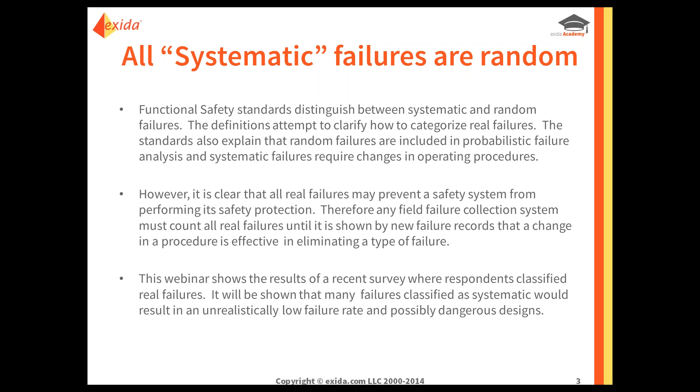We're going to also look at some real-world examples and talk about if it is a random failure or a systematic failure, and we're going to go through examples and actually do a couple of polls to see what your answers are and compare them to a survey that we sent out to see what other people's answers were. And we'll go through each question and pull it apart, why it would be considered random or systematic.

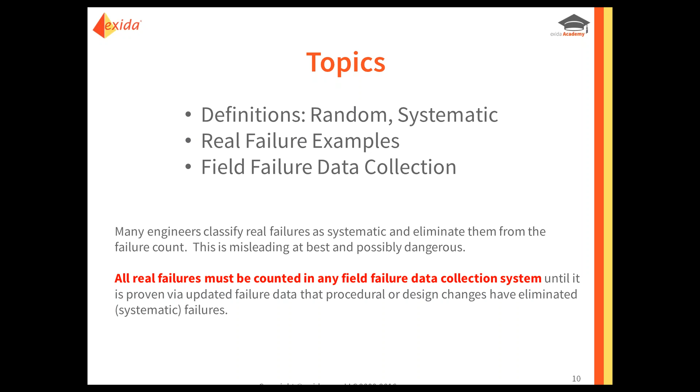This all comes to play where we take a look at end users' field failure data studies. And these data studies are an absolute rich opportunity to obtain site-specific failure rates and failure mode information about a specific product in a specific application.

But there are some problems when companies compare their end-user field failure data studies to each other's. First of all, a number of companies have either insufficient information on their field failure reports, or they have different data collection analysis methods, and they have different definitions of what is a failure. Some companies would take the exact same failure in the exact same application, and one company would say it's random and one company would say it's systematic.

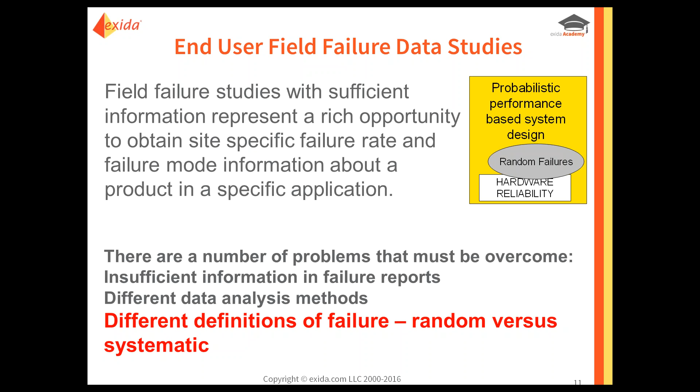And because of those, the end user field failure data studies are getting a little bit of a bad rap. But that's not what we want to portray. We want to show that there could be very valuable information in these data studies. However, you need to know all of the things to look for when you incur one.

So the first thing to understanding random versus systematic failures is looking at the actual definitions from IEC 61508. And both of these definitions were pulled from the latest IEC 61508 standard, which was updated in 2010. They define a random hardware failure as a failure occurring at a random time which results from one or more of possible degradation mechanisms in hardware. Okay, well, that doesn't really tell you very much. So we can understand why random failures are a little confusing.

When you look at the definition for a systematic failure, it does tell you a little bit more information. A systematic failure is a failure related in a deterministic way to a certain cause, which can only be eliminated by a modification of the design, or of the manufacturing process, or the operational procedures, or some kind of documentation, or other relevant factors. So it's a lot easier to understand what a systematic failure is from this definition than the random failure, but it's still not cut and dry.

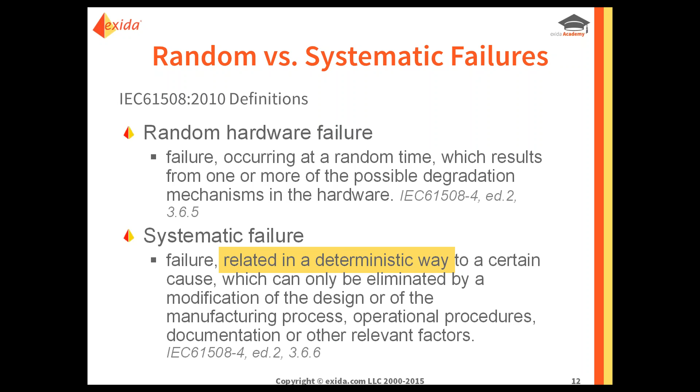So the new edition of IEC 61511 has just been updated in 2016, and they improved the definition of a systematic failure. And it now reads, a systematic failure is a failure related to a pre-existing fault which consistently occurs under a particular condition and which can only be eliminated by removing the fault by a modification of the design, of the manufacturing process, of the operating procedures, the documentation, or other relevant factors.

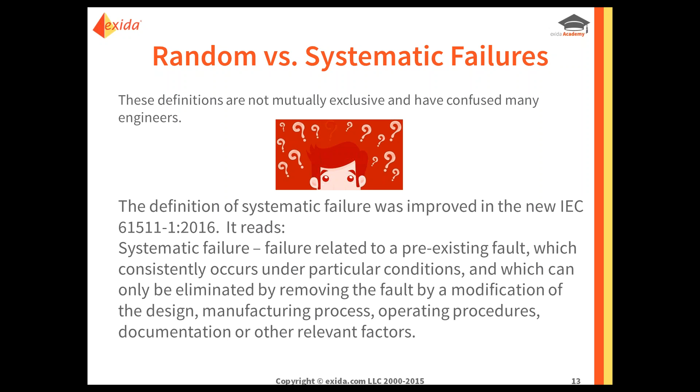So you still have to change something in documents or procedures in the systematic definition. But the beginning of the definition in the 61511 explains what they mean a little bit more for a systematic failure. In doing so, the focus on the systematic definition should be made resulting in a safe, practical interpretation. So looking at the 61511 definition, besides changing the process or the documents or the design, what really stands out now is that there's a pre-existing fault which occurs in random conditions. So we're going to take a closer look at what that actually means.

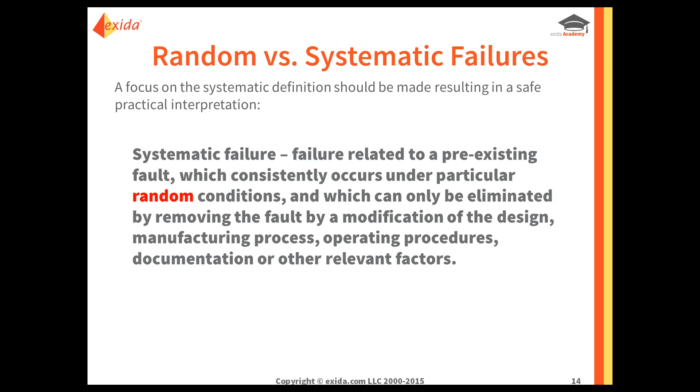So a systematic failure will cause an increase in the probability of failure on demand, just like any random failure, as particular conditions can be modeled in the same way. Thus, it is essential that all failures be included in a failure rate analysis. And we will understand what all of that means later on.

But for now, remember that systematic failures will continue to occur until they are effectively addressed by design changes, by process improvements, by better training or better documentation, better reviewing, better testing. With systematic failures, there has to be something that is improved upon. And until that improvement is taken into consideration and you retest or you redo the documentation, making sure that this problem isn't going to pop up again, it needs to be counted in failure rates because it will keep happening until it is properly addressed.

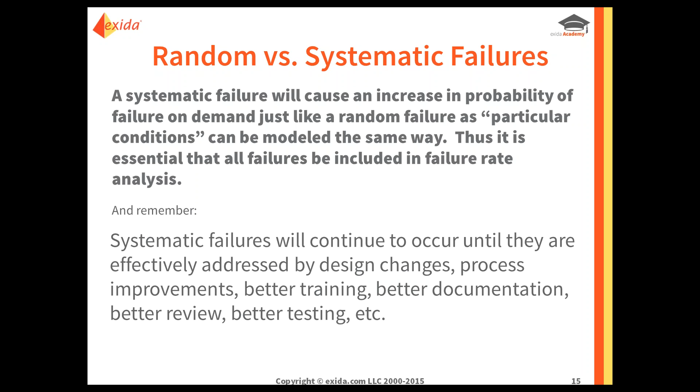So some tend to classify many real-life failures as systematic. And in doing so, they end up with very low and unrealistic random failure numbers. And we think that that has a lot to do with the blurred line of what is random and what is systematic. And it's simply not defined well.

It should always be the objective of any failure data collection program to collect all of the information on all of the failures and count all realistic failure rates as random until it is absolutely proven that systematic changes have eliminated any future failures of a given type.

So until you know that your changes affect that systematic failure in a positive way, you need to count that systematic failure as random. And then once you've changed the documentation or the design, you've changed the material that wasn't quite working out, you've had multiple batches go through, you made sure that it's not going to have the same issue, then count it as a systematic failure.

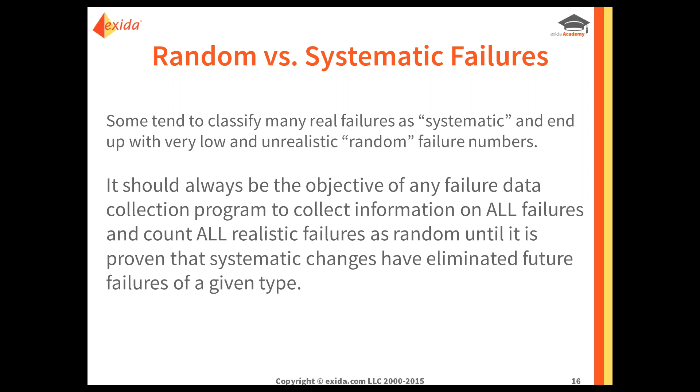So I learn best from looking at real-life examples. And I thought we could do that today to really make this all sink in. I'm going to first read a scenario and ask you, is it random or systematic? In doing so, I will open up a poll and ask you to answer. And I can't see who voted for what. I can't look that up. It doesn't really matter to me.

But we sent out 15 questions to a mailing list, and we chose 3 of the 15 to show you today. We sent out the survey, and we had a bunch of answers come in. And I'm going to compare our answers to the survey that we did and see how real-life examples could possibly be problematic. Or you can see how many companies in different locations have different definitions of what is random or what is systematic.

So for the first example, we're going to look at a flood alarm system that failed to annunciate high water levels in an industrial process such that an orderly shutdown could not occur and electrical power was not disconnected. This resulted in significant equipment damage beyond the normal cleanup cost.

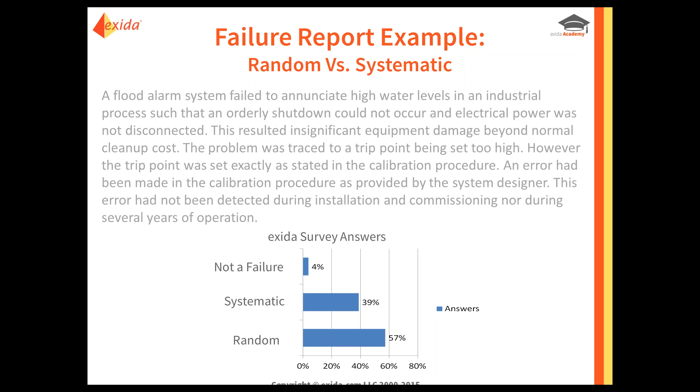So our webinar had a more clear direction that people wanted to head, but as you can see from the survey answers, it's not necessarily black or white. This is not a cut and dry definition or even example. And these are real world examples that we're looking at, so we can understand how it could be quite confusing. So let's break apart the question and see what you should concentrate on and what you should look at here.

So the main problem was that the trip point was set too high. So the first question you should ask yourself: would this failure still have occurred if procedures were corrected? Probably not. No, the failure was simply caused by the incorrect information stated in the document. Okay, so if this failure was classified as systematic and not included in a failure count, would that count be dangerously optimistic?

No, I don't think so. The calculated dangerous failure rate would be considered fine if the problem has been corrected. So if the problem has not been corrected yet, we would consider this a random failure.

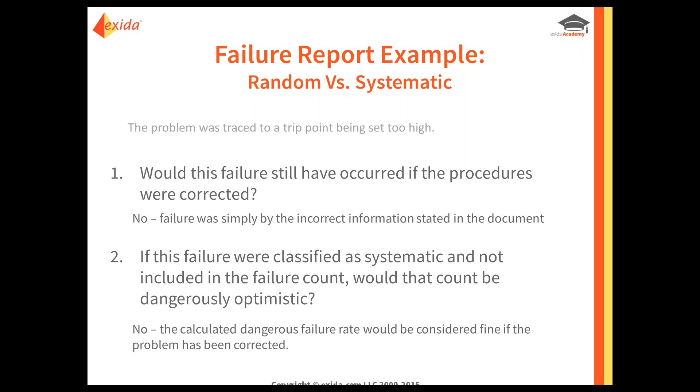But if the document has been changed, if there has been some time that passed and people have been setting that trip point to the corrected procedure, then that error would no longer happen. So if all of that has been taken care of and you have proof that this was just because of the procedures, it is taken care of, will not happen again, then it is a systematic error. And you can count it as such. You do not need to count it in your failure rates.

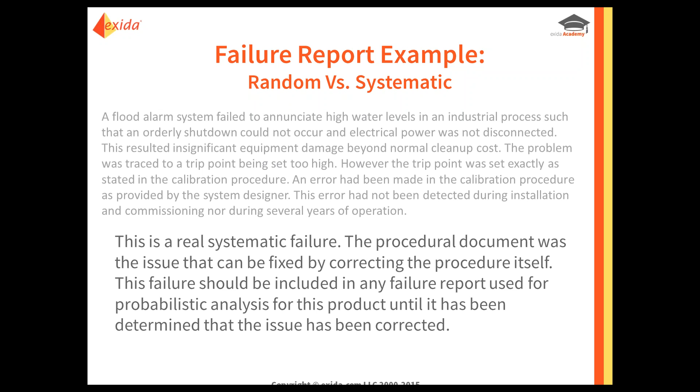So the procedural document was the issue that can be fixed by correcting the procedure itself. This failure should be included in any failure report used for probabilistic analysis for this product until it has been determined that the issue has been corrected. Okay, so now let's take a look at some harder questions.

Next, we're going to look at a failure that occurred when a de-energized to trip remote actuated valve closed and shut down the process during normal operation. The failure was traced to a PLC logic solver rated to 50 degrees C, where an output module failed de-energized. A component in the output module, a transistor, had failed such that it could no longer conduct current.

The ambient temperature was hot. It was 55 degrees C. They did an X-ray of the transistor to see what happened, and it showed a burned out bond wire, likely due to an electrical overstress. So I'm going to open up the polls again. So do you consider this failure random or systematic?

Now if you go ahead and vote again, if this was random or systematic. Once again, I cannot see who voted what, so it doesn't matter if you're right or wrong. This is just for education. Okay, we have a good portion of the votes in. Great.

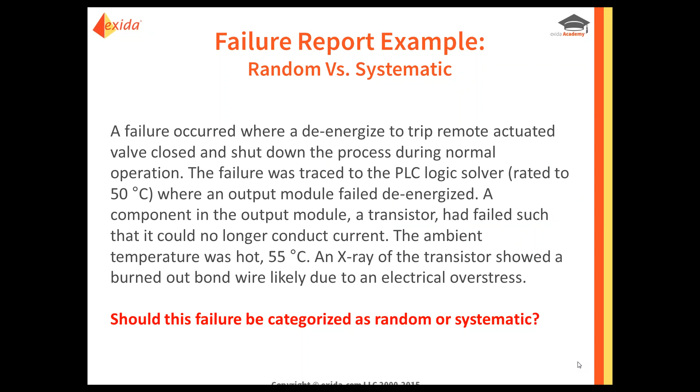So I'm going to share with you what our webinar saw it as. And as you can see, 43% of the people in the webinar said this was a random failure, and 57% said systematic. So we're pretty evenly split. It's not something that you can say, oh, it's definitely random, or oh, it's definitely systematic.

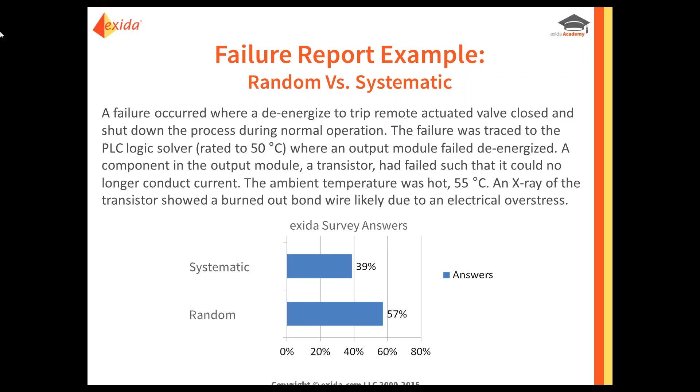So we'll take a look at what our survey said. And our survey was kind of flip-flop. It said 39% of people that took our survey thought it was systematic, where 57% said it was random. So once again, you can't really say there was a clear direction either way. So let's break apart this question.

So the X-ray of the transistor showed a burned out bond wire, likely due to an electrical overstress. So the first thing that we want you to ask: would this failure still have occurred if the temperature had been 45 degrees instead of 55? Actually, it probably would have, because the failure was caused by an electrical overstress.

So if this failure was classified as systematic and not included in the failure count, would the count be dangerously optimistic? Probably. The calculated dangerous failure rate would be too low. This would need to be a random failure and counted in their failure rate.

And the explanation is this is a real random failure. Although some argue that it should be classified as a systematic failure because the actual temperature was greater than the specification, that factor did not cause the failure. This failure should clearly be included in any failure rate used for probabilistic analysis for this product. So we don't care if you call it random failure or systematic failure. The main bottom line is that it needs to be included in the product failure rate.

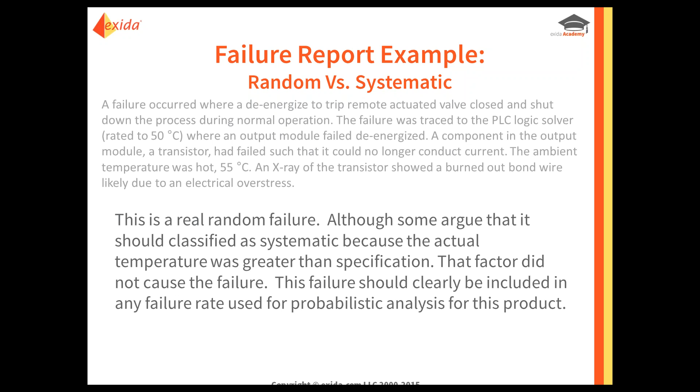So for the last question we have, a maintenance technician routinely checks and adjusts the trip point on a motor shutdown relay. The procedures for checking and adjusting the relay were all correct. All personnel were well trained in the procedure, and the failure occurred when a mistake was made with the adjustment. The trip point was set too high and the motor was not shut down to maintain safety. So once again, I'm going to open the poll: would you consider this a random or a systematic error?

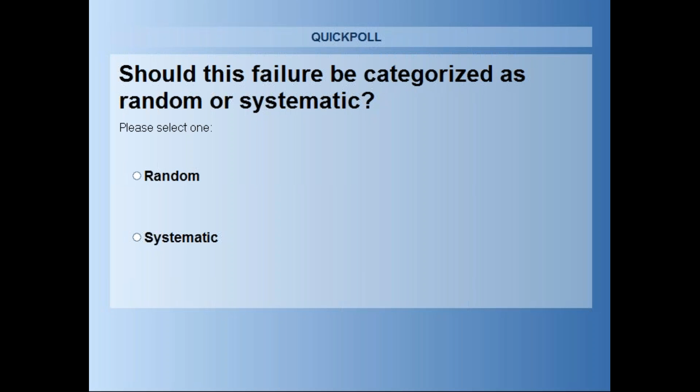Okay, the votes are coming in. Okay, we have a good portion of them in. Let's close it, and I will show you. There we go. As you can see, 42% of our webinar users think that this should be a random failure, while 58% said this should be a systematic failure.

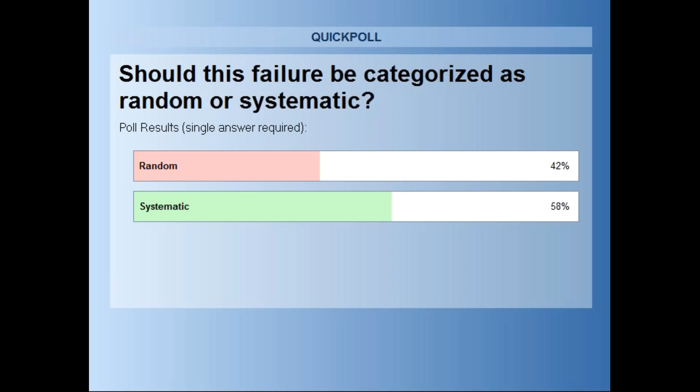So now let's compare that to our survey. And we were very, very close to our survey results, where 57% instead of 58% said systematic and 43 instead of 42 said random.

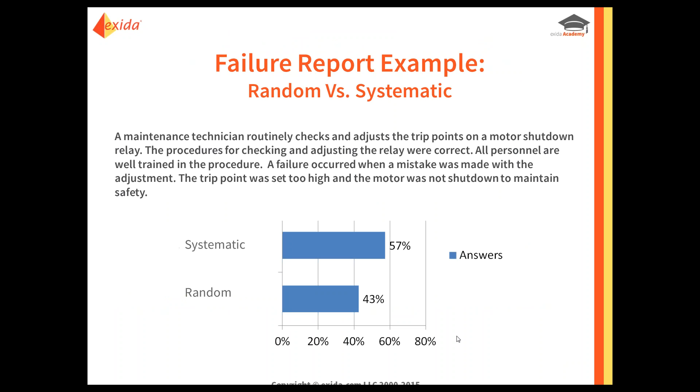So what are the sticking issues here? So first of all, what pre-existing fault has occurred? Well, there's no really pre-existing fault that's clearly given. The procedures were correct. The people that did the maintenance routine checks were well trained. What happened? Well, sometimes people make mistakes. Sometimes people have a bad day, or they're thinking about something going on at home and their head's not completely focused at work. It's not always something that you can prepare for.

So the next thing, what procedure could have been enhanced so that this could be a different situation or this failure not happen again? Well, an argument could be made that a new procedure is needed where a second person checks every adjustment, and when the maintenance budget is doubled, those changes can be made and handled. But the procedure was correct and people were trained correctly. Just sometimes people are people. They're not perfect. They're humans.

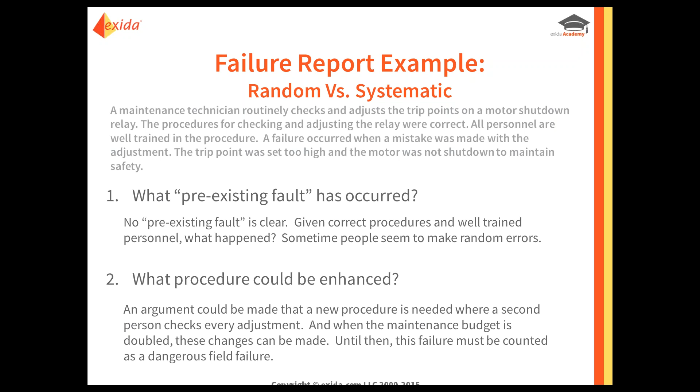They make mistakes. So until there is a buddy system or a double check procedure in place, this failure needs to be counted as a dangerous field failure. So whether you want to call it a random or systematic, that doesn't matter. The main point is it's included in the safety failure rate calculation. So per our vocabulary, we would call this a random failure until new procedures are established and proven. So this failure clearly needs to be in any failure rate and used for probabilistic analysis at this site.

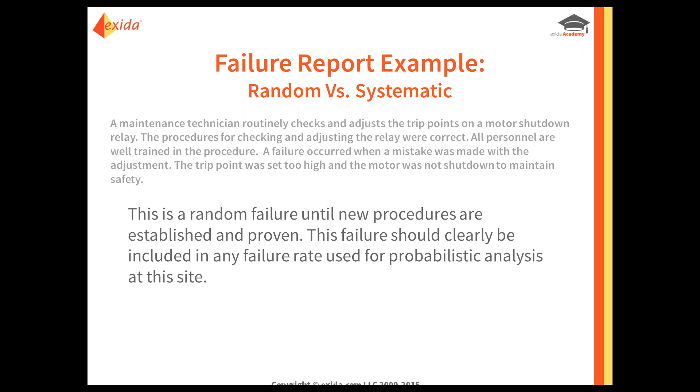And that brings up a good point that there could be different sites within the same company that have different ways of dealing with random versus systematic, different definitions of dealing with random versus systematic, even different maintenance. So there is something that we highly recommend called the Site Safety Index. And this is a model for the probability of a site-specific error that impacts the failure rate.

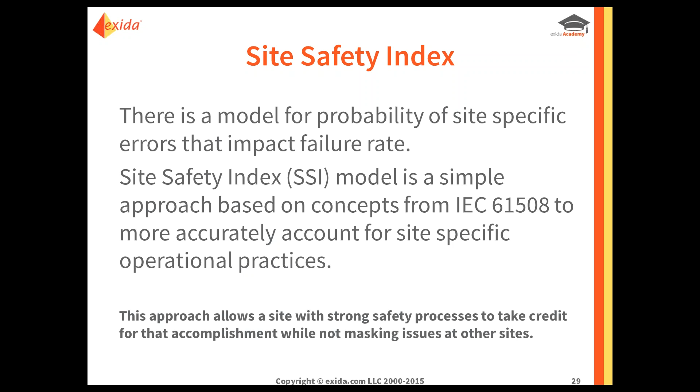So the Site Safety Index model is a simple approach based on concepts from IEC 61508 to more accurately account for site-specific operational practices. So this approach allows a site with strong safety processes to take credit for that accomplishment while not masking issues at other sites. So if your company is doing all of the right things, they're really trying hard, and they're mostly getting there, but you have a sister company whose maintenance is a joke, you don't want to be penalized for their issues, but you don't want to cover up if they're going to have dangerous failures in their devices. So what to do?

You create a Site Safety Index model, and there's several different factors that have been identified thus far which impact the Site Safety Index. And these could be a combination or just a few of these, but you want to look at the quality of the equipment selection and the qualification, the commission testing, the quality of safety validation tests, proof test procedures and documentation, failure diagnostics and repair procedures, device useful life and tracking and replacement process, the SIS modification procedures and decommissioning procedures, and a bunch of other things can be involved in the Site Safety Index model. So when you're evaluating yourself for the Site Safety Index, those are all things that you want to keep a mental note of.

So in the Site Safety Index model, there's 5 different levels, level SSI 0 through level SSI 4. And these are all models in exSILentia where you can see what the difference between SSI 0 to SSI 4 would be. So let's take a look at SSI 0 first. What is your maintenance? What is your site safety? Well, hopefully none of you are in this boat, but what if you have none? What if something breaks? Repairs are not always done. Testing's not always done.

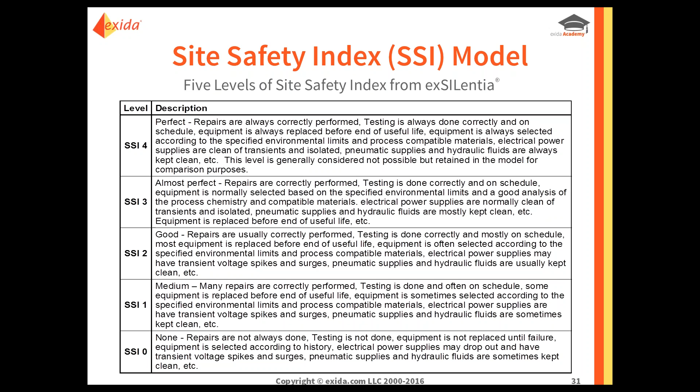Every human I've ever met is not perfect at everything. And that's kind of the SSI 4 level: you are in a condition that is so much better than everybody, you always do everything perfect. That's just not realistic. So hopefully you're also unrealistic as SSI 0. So you will fall somewhere in between the 1, 2, or 3 level.

So what all is impacted by these site practices? Well, your failure rates for each product would be impacted, your actual proof test intervals and proof test effectiveness, the actual mean time to restore, and the probability of initial failure.

So what happens when you're looking at field failure rates according to SSI levels? As you go down the SSI level closer to 0, your failure rates are going to be increasing. In field failure studies, where we collected and studied billions and billions of unit operating hours here at exida, we've actually found a failure rate multiplication factor between 2 and 4, depending on the product type, when comparing SSI 0, or no maintenance whatsoever, and SSI 4, as in I'm always perfect.

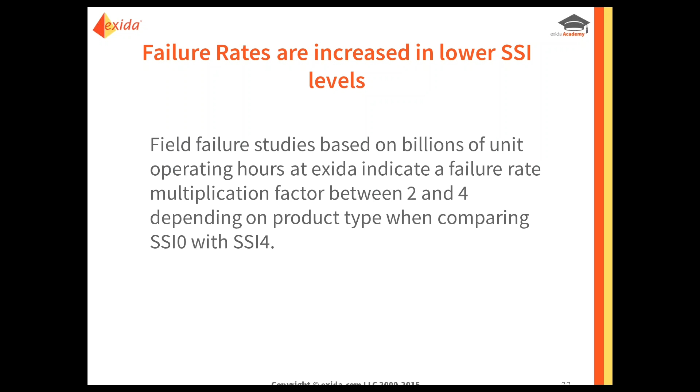So they could be 2 times, 3 times, and 4 times, depending on where you fall. So that could be a big difference in failure rates from site to site. Even within the same company, you could have a different failure rate from site to site.

So as advice, when you're looking at SIL verification, we suggest that any safety lifecycle tool that automatically updates failure rates used for PFD average calculation should be avoided. Failure rates used for SIL verification should never be just automatically modified without an expert review of the data collection process.